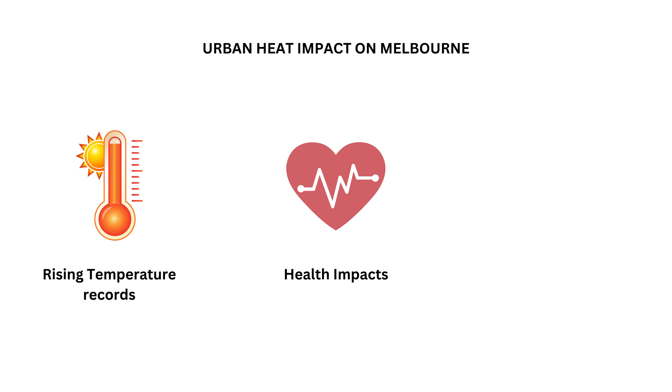25 days annually. Urban heat has significant health implications, with the Victorian Department of Health warning that the rising temperatures will likely lead to more heat-related deaths each year. Additionally, infrastructure is affected, resulting in public transport disruptions and power outages, as noted by Transport for Victoria.

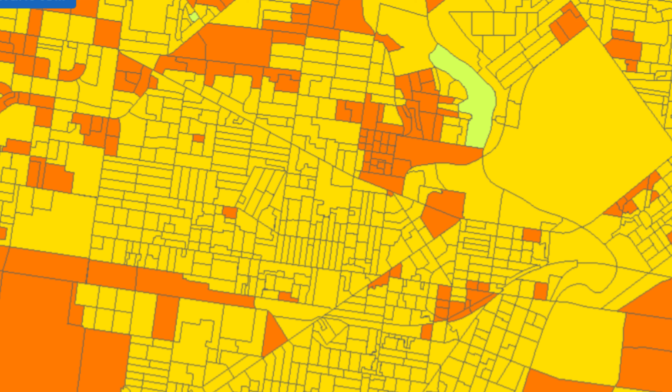Footscray is known for its diverse community, vibrant culture and its rich history. Footscray Market is known for its fresh produce, food stalls and great atmosphere, and therefore we will have this site as an example to show how urban heat can be improved in certain areas of Footscray.

The current market is located at the base of the building, with a double-storey car park above. The main material used is concrete with some glass. The choice of material absorbs heat, which ultimately makes the building itself warm, making the inside of the building quite hot as well. The gaps in the facade on the upper floors allow for some airflow, while the base market levels don't allow for airflow apart from the existing entry points. There is an overall lack of vegetation on this site.

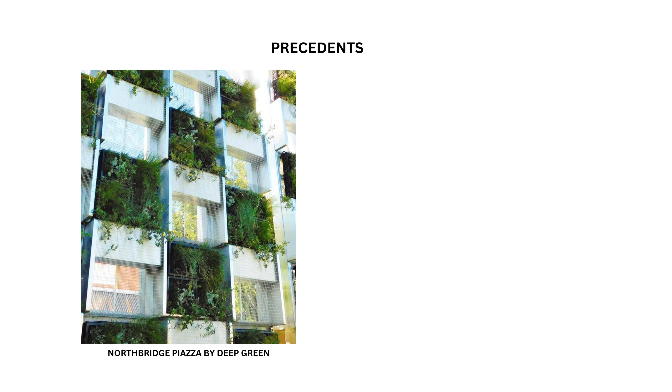Considering this, we decided to add a green wall on top of our existing facade, therefore keeping demolition on the site low while still being able to cool the large concrete form. The rainwater would be collected at the base of the facade and then pumped back into the vertical garden, keeping the maintenance to a minimum.

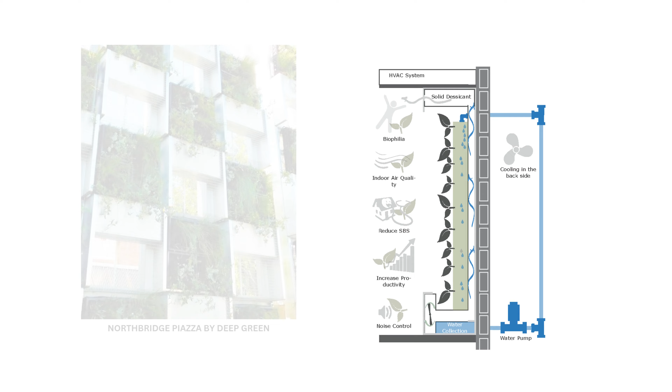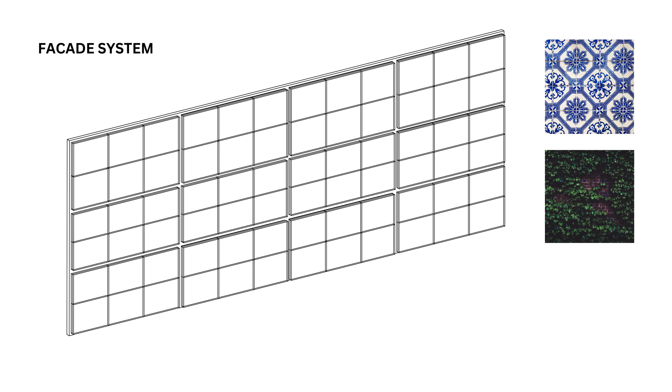On top of our existing facade, we've placed a framing system, mosaic tiles to add a unique aesthetic and allow for an easily modified backing to attach our varied vegetation types on. In our facade system, we have left many gaps to allow for proper ventilation and airflow through the large building.

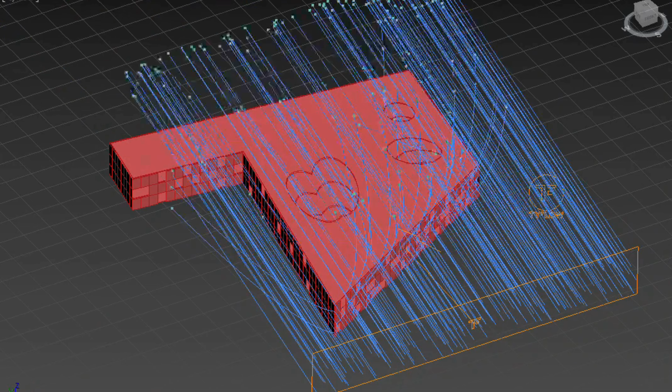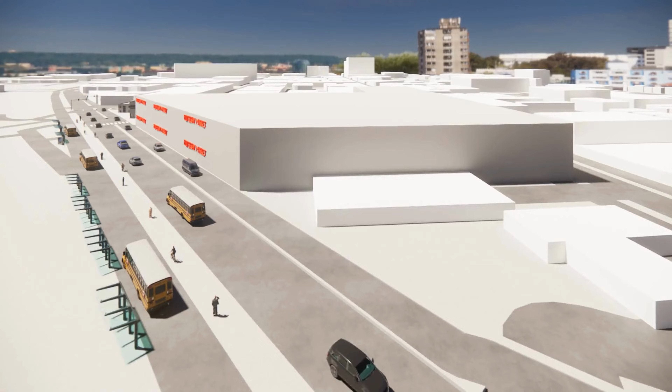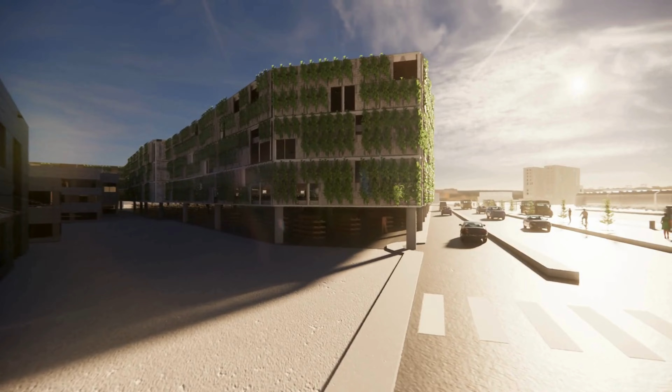This is the existing Footscray market before our design. And now after, you can see how our market stalls are completely open to the surrounds. Our internal atriums have been angled according to winter and summer solstices and include specific vegetation based on location in the building.